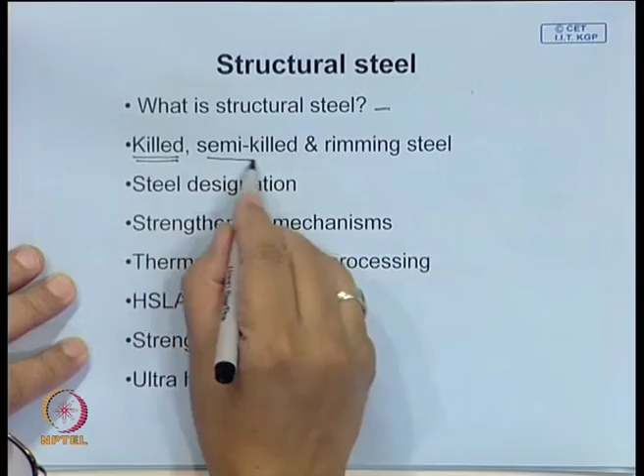We will see how the principle of physical metallurgy has been used in this particular case to improve strength very effectively. Since the 1980s, a very large number of newer grades of structural steels have been used, and these have found application in many other areas as well. Here we will first know what structural steels are, then talk about a few important points. There are steels which we use, put into three categories: killed steel, semi-killed steel and rimming steel, and what they are and how they are produced. We will also know a little bit about steel designations. We will talk about strengthening mechanisms, and find out which of these mechanisms is most applicable to improve the quality of structural steel. We will talk about thermomechanical processing by which this is achieved, and about high strength low alloy steels, also known as microalloyed steel. We will talk about the relationship between strength and toughness, and also know what is meant by ultra high strength steel, how they are produced, and what goes into improving the strength of steel.

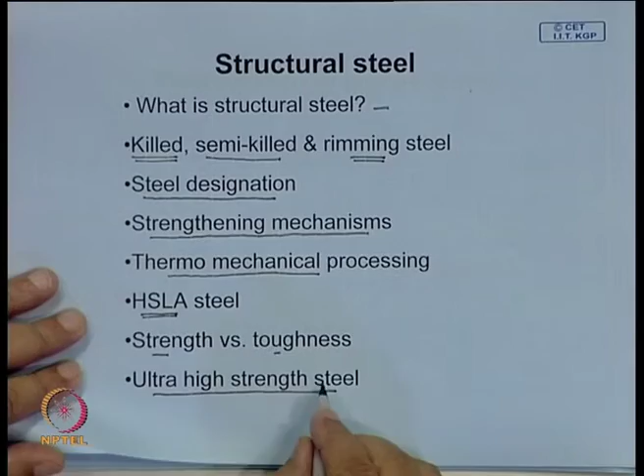We talked about this tetrahedral concept, where properties of materials depend on composition, that is the chemical composition. Similarly, properties also depend on how you process the material. For example, a fine grain structure will have higher strength, so how do you produce fine grain? All these together affect the performance.

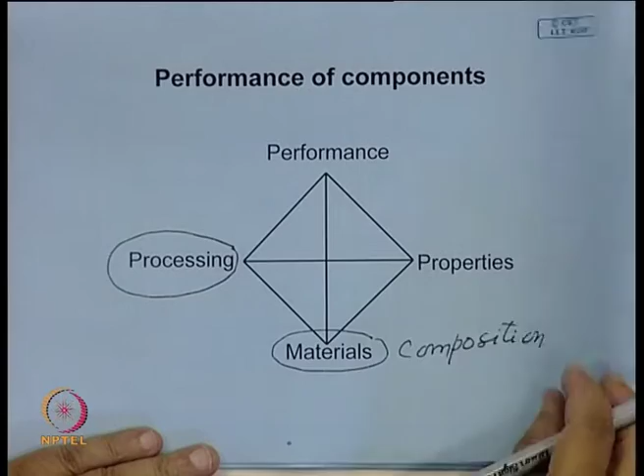Last class we talked about the limitations of hardening a steel, because this is totally dependent on section size. In many cases if the section size is large, it cannot be hardened, because by quenching, the strength of steel can be increased many fold. So this would be the most obvious choice for strengthening, but it cannot be applied because a fully martensitic structure can be attained only over a very limited thickness, depending on the type of steel used. This has been used very effectively to find cases, to utilize this by modifying the composition, and we talked about case hardening. I am projecting this here because I just realized there has been some mistake which I will explain.

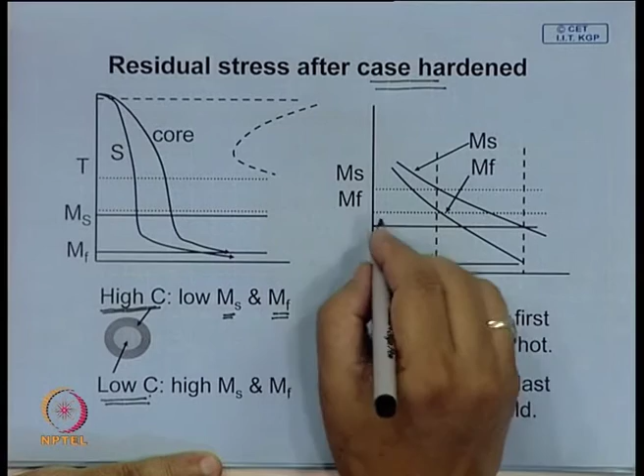When you have a large section, you want the core to be tough, so one would prefer a low carbon steel. Since it cannot be hardened through and through, the attempt is made to enrich the carbon content of the surface by different carburizing processes like pack carburizing or gas carburizing. You increase the carbon content of the case, while the core remains low carbon content. When you make this modification, the MS and MF temperatures decrease. So the case, having high carbon content, will have a lower MS temperature, this is the MS temperature, and this is the MF temperature.

So the case has lower MS and MF temperature than the core. When you quench or cool this job, trying to cool it fast, the core, being the inner portion, always cools slower than the surface. But in spite of this, the core crosses its MS temperature before transformation begins in the case, although the case temperature is lower at any instant. So at any instant, before this starts, it is possible by controlling the cooling rate to allow the transformation to begin first in the core, before it starts in the case. So this line should be, I think, a little to this side.

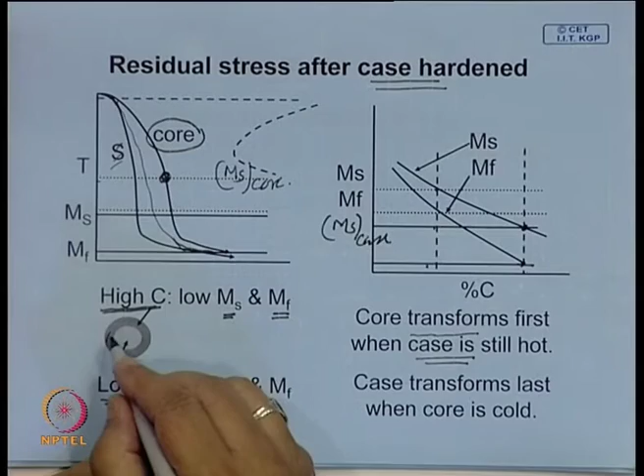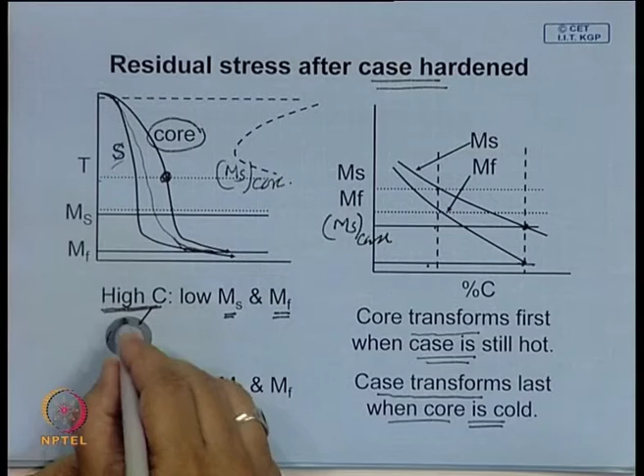So the trick is the core transforms first when the case is still hot. So when the core tries to expand, the case can deform and accommodate the strain. Later, the case transforms last, when the core is cold, so the core will not allow it to expand, and a residual compressive stress develops on the surface.

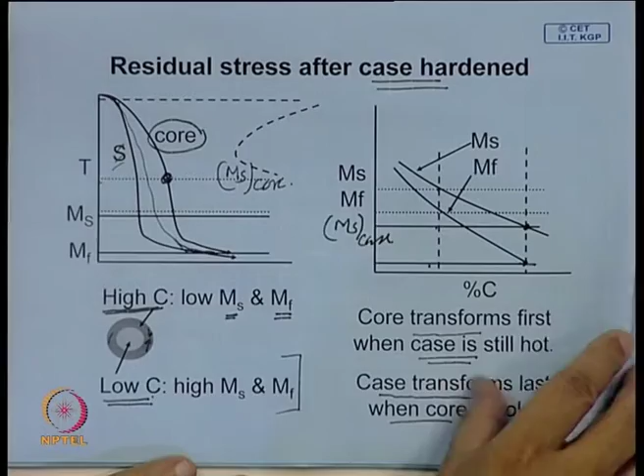This is the reason why, because of this difference in Ms and Mf temperature, by modifying the composition it is possible, through case hardening, to introduce a favorable residual stress - compressive residual stress at the surface - and thereby improve the performance of the component. The same basic principle has been used in structural steel as well, and we will see how this is done.

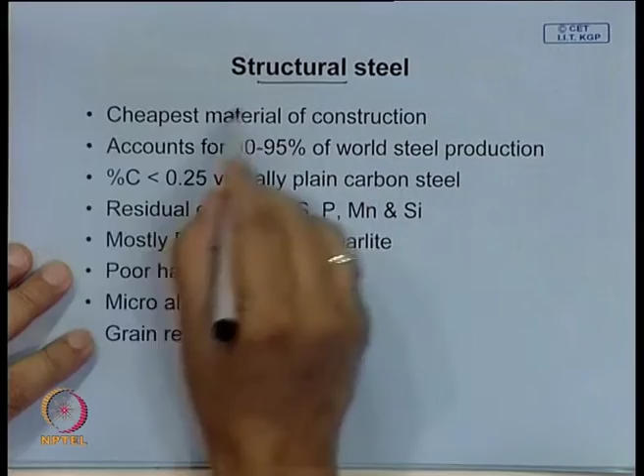Now, what is meant by structural steel? It is the cheapest material of construction. Bulk of construction is made of structural steel, and cost-wise, it is possibly only cement concrete structure that is cheaper; the next cheapest material of construction is structural steel. It accounts for the bulk of world steel production, maybe as much as 95%.

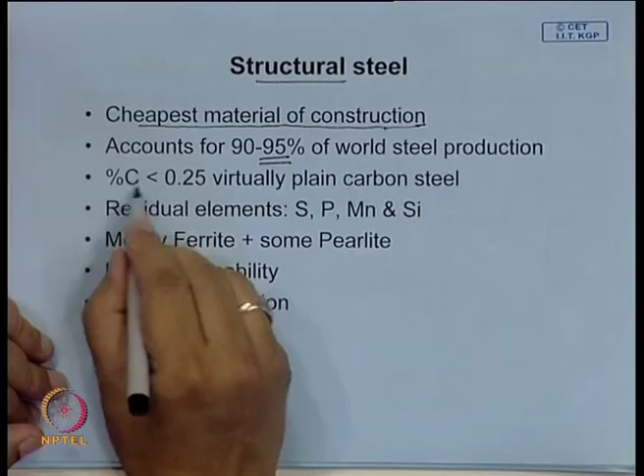We call any carbon steel with less than 0.25% carbon relatively low carbon, and it is virtually plain carbon steel. It has some residual elements which are not intentionally added, which are listed here.

Sulfur is undesirable; it gives hot shortness, makes hot working difficult, and to overcome this, some amount of manganese is added to steel. Phosphorus is also detrimental.

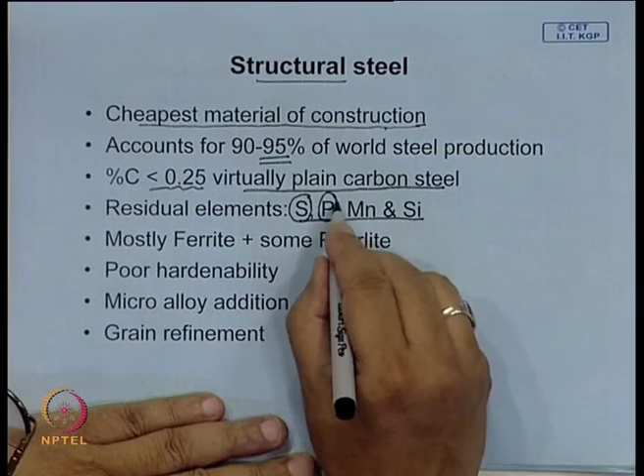Phosphorus has a very high hardening coefficient, it increases the strength of ferrite significantly, it improves solid solution strengthening - it is a very important solid solution strengthener for ferrite - but it segregates to the grain boundary and makes the steel brittle, and it is responsible for cold shortness. It is brittle at low temperature.

Manganese is often used to overcome the bad effect of sulfur. It forms manganese sulphide, which has a high melting point, and therefore it is distributed uniformly in the steel, overcoming the problem associated with hot shortness. Silicon is often used as a deoxidizer, and it also has some beneficial effects as well.

But the amounts in which they are present are very small - like sulfur and phosphorus - you will rarely have more than 0.05% of these, or even better quality steels these days have even less sulfur and phosphorus.

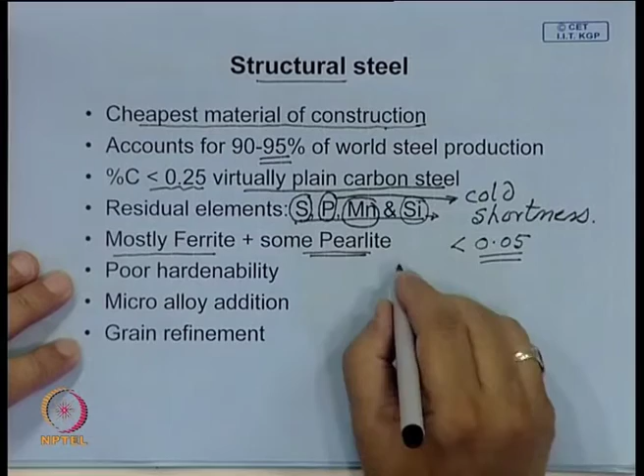This microstructure of structural steel is mostly ferritic. It may have some pearlite depending on the carbon content. Many of these grades have as low a carbon content as 0.07, so virtually it will be made up of mostly a ferritic matrix with a very little amount of pearlite.

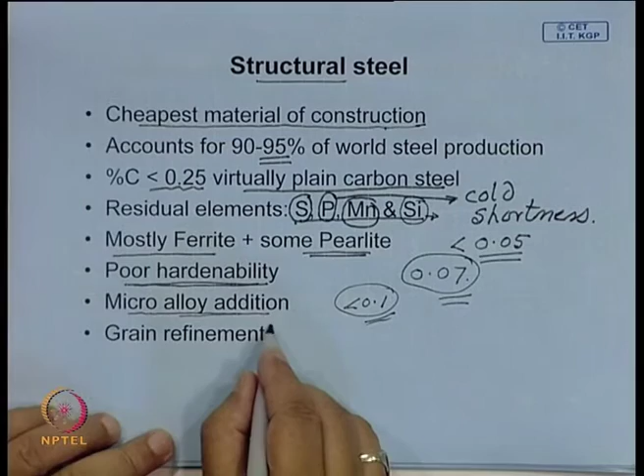Because it has low alloy content, it has poor hardenability, so martensitic strengthening - strengthening by hardening - cannot be done here. Often you may have some micro-alloy additions in very small amounts, even less than say 0.1 or 0.05%. If certain elements are added in such small amounts and combined with thermomechanical processing, it is possible to refine the structure, make the grain size very fine, and thus improve the strength of the steel.

Now let us see what are the factors - I think this was done, but to recapitulate, let us go over a few lines about the three major classifications of steel.

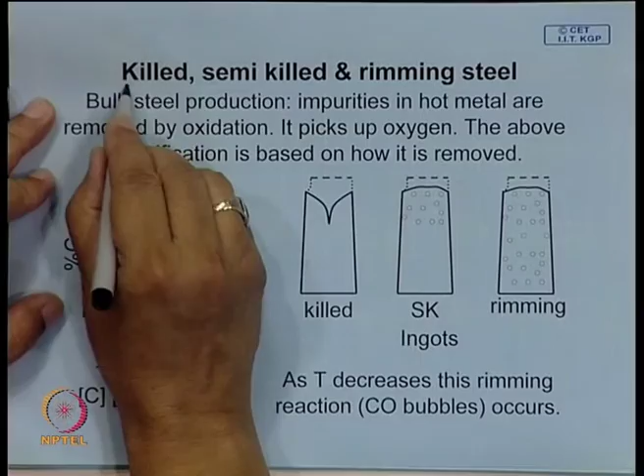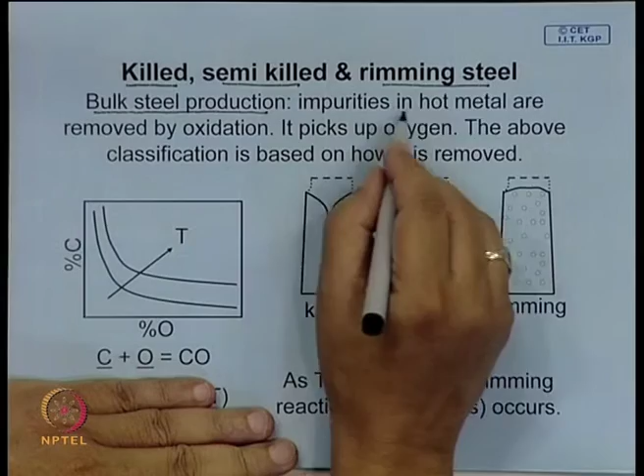It is based on the way the steel is deoxidized. If you look at the bulk steel production technique, it is produced from hot metal, which comes from, let us say, a blast furnace - hot metal which is actually cast iron. It has a very high carbon content, maybe around 4%, it has silicon also, and these impurities also include sulfur and phosphorus, which must be removed to make it steel, because such high carbon material is extremely brittle and cannot be formed.

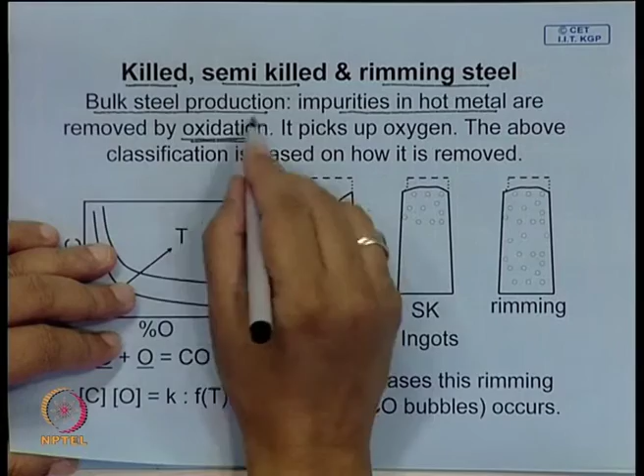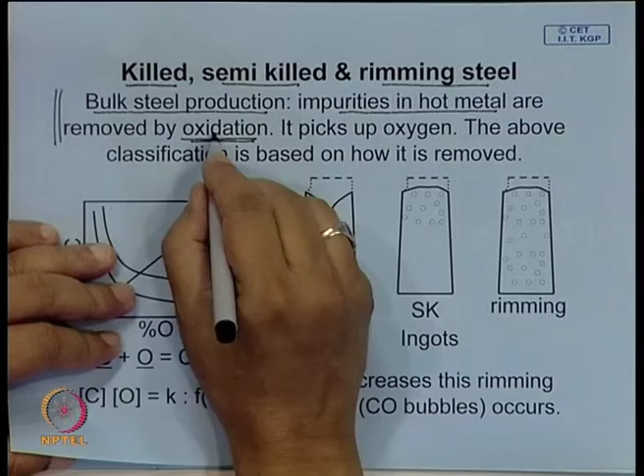So these impurities are to be removed, and this removal is done by an oxidation process. In the Basic Oxygen Furnace (BOF), oxygen is blown from the top, and this oxygen reacts with these impurities, which are absorbed into the slag. In the process, since the atmosphere maintained in the furnace is oxidizing, the steel also picks up oxygen, which is in a dissolved state in the liquid iron.

This dissolved oxygen has to be removed, because as you cool down, unless you do some special treatment to remove it, you often find that when the steel solidifies, there is a vigorous reaction taking place.

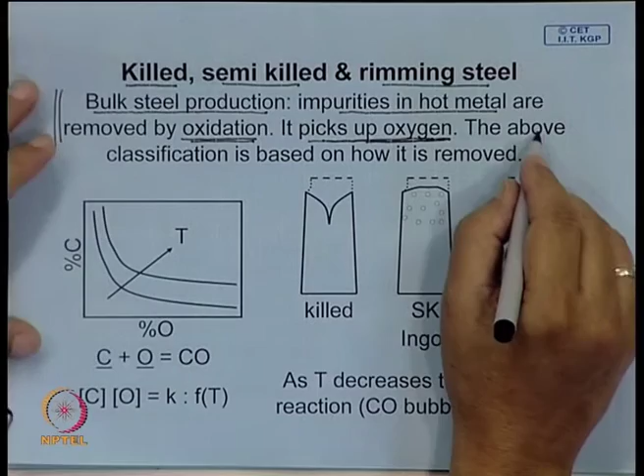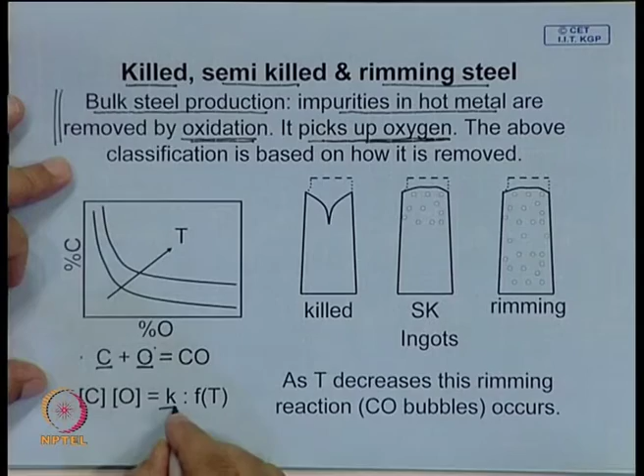This is primarily because in steel, the solubility of oxygen in molten iron depends also on other alloying elements, particularly carbon. You are trying to remove carbon by oxygen, and the soluble amount of carbon and oxygen that can remain in solution in iron is given by this equilibrium reaction. The product of concentration of carbon and oxygen in steel is called the solubility product, and this product is a function of temperature, it is constant.

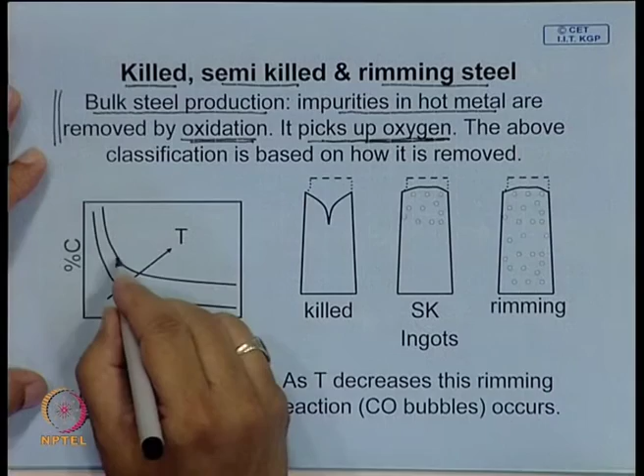If you plot a graph of percentage soluble carbon in iron versus soluble oxygen in iron, you will get this kind of hyperbola, because this equation is that of a hyperbola. Therefore, higher the temperature, higher is the solubility product. So as temperature increases, if it has this much amount of oxygen, it will have this much amount of carbon.

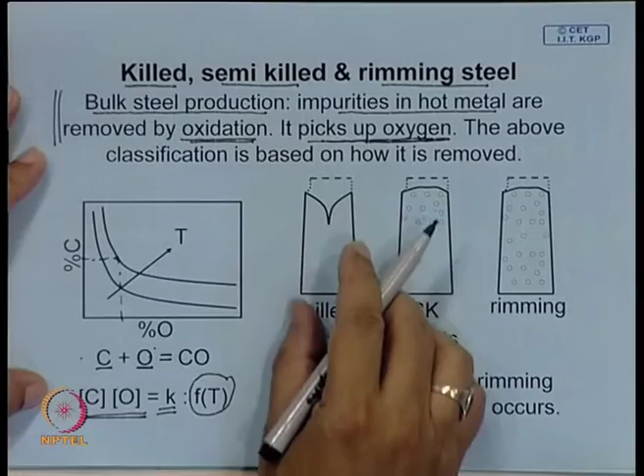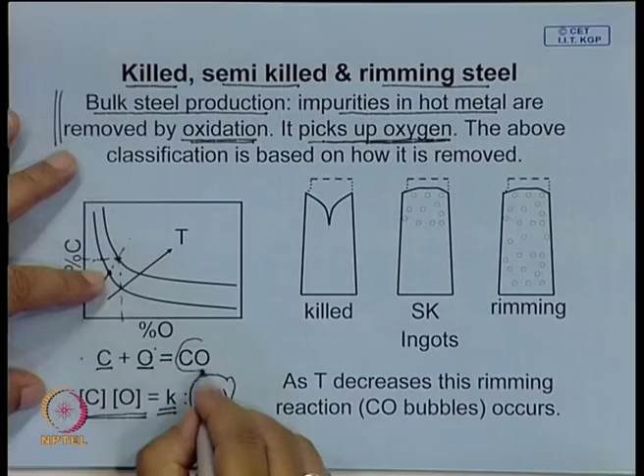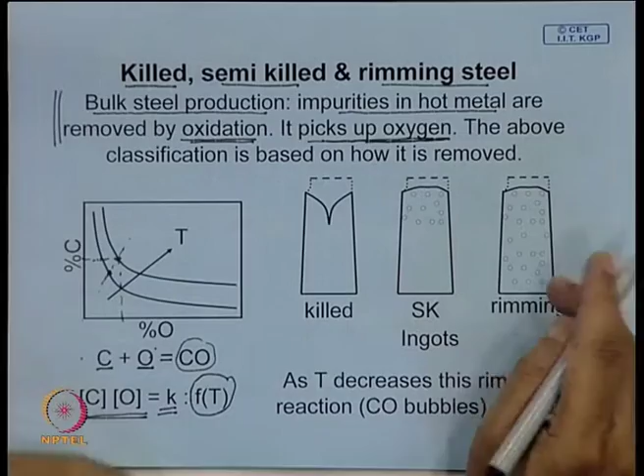But when you cool the steel, when you pour the molten metal into an ingot like this, what happens as the temperature goes down? It has a higher amount of carbon, and that carbon now has to come down. If carbon comes down, oxygen also comes down, since solubility of oxygen also decreases. So what happens to that excess carbon? It reacts and forms CO bubbles, and these bubbles try to form. This is a vigorous reaction, and you have to control it properly.

Often, if molten metal solidifies normally, there should be contraction, and you usually get this kind of shrinkage.

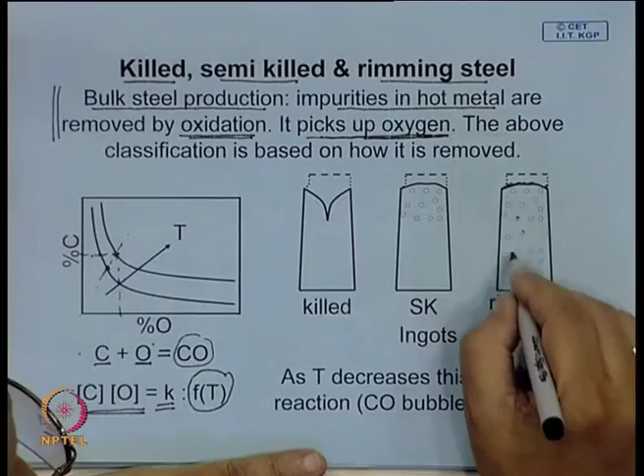Whereas in this particular case, if this vigorous reaction takes place, it is called a rimming reaction, or rimming action. Some of the CO bubbles are not able to escape, because if a crust forms, they won't be able to escape, and you get a steel which is full of CO bubbles, and it compensates for the shrinkage cavity. This has one advantage, you get higher yield, but it has a problem: you have some amount of dissolved oxygen in the steel, and oxygen makes the steel brittle.

So rimming steel, although during subsequent rolling these pores seal up and all that, because of some amount of soluble oxygen in the steel, it has relatively poor ductility and a higher transition temperature.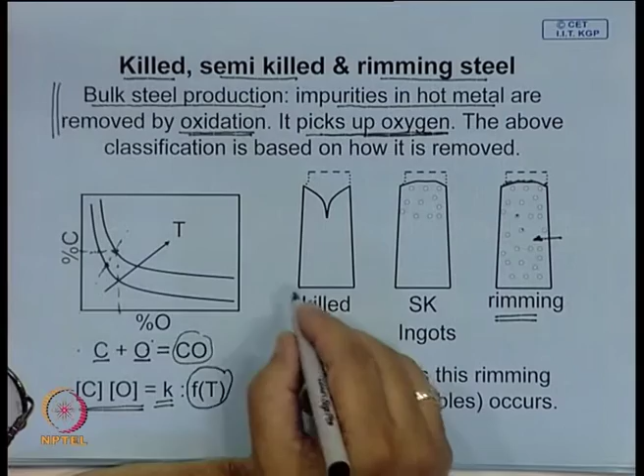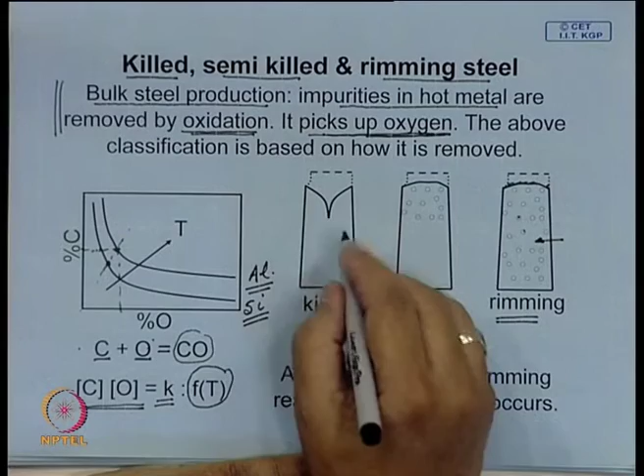At the other extreme, if you add a deoxidizer, and one of the preferred deoxidizers is aluminum, which has a very strong affinity for oxygen, this oxygen will be used up by aluminum or silicon. Depending on what you are adding to the steel, you can stop this rimming reaction completely, and in that case you kill this particular reaction. That means you kill the steel which is very reactive.

Therefore, you get a large shrinkage cavity, and when you roll here, of course, the yield is low, because later on you have to crop a certain part of it which cannot be shaped into, say, flat products or sections.

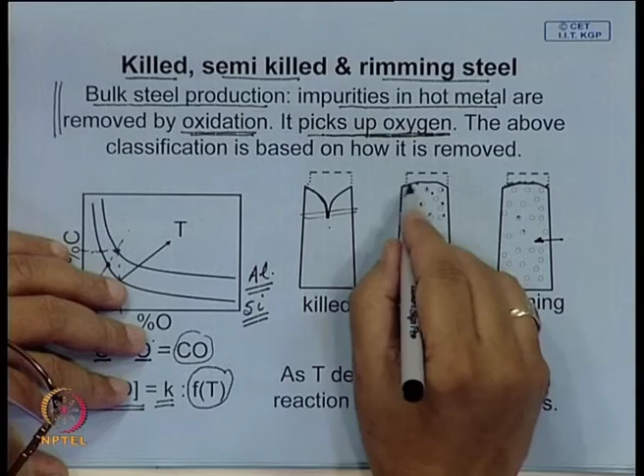In between, it is also possible to have a controlled amount of this deoxidizer, so that you can control this rimming action and not allow this shrinkage to take place. So some amount of CO bubble is allowed to form, and by this the yield can be increased.

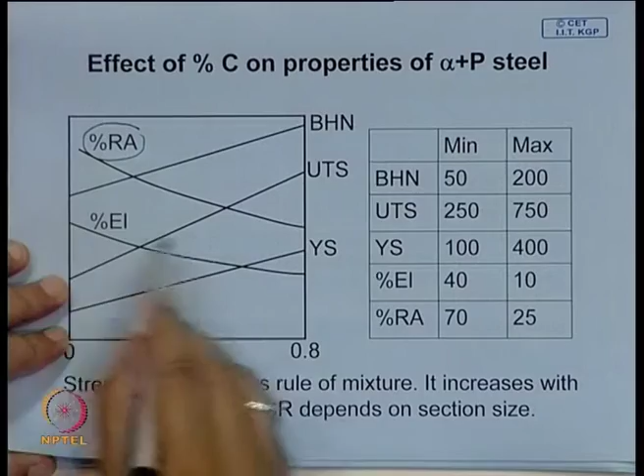Now, a quick look at the effect of carbon content on the properties of steel. I think this was mentioned earlier, that with carbon content, yield strength, UTS, and hardness all increase, but the ductility, represented by reduction in area, decreases with increasing strength or increasing carbon content. Ductility, if expressed in terms of percentage elongation, also decreases, and these are the values of that range of properties, which are listed here.

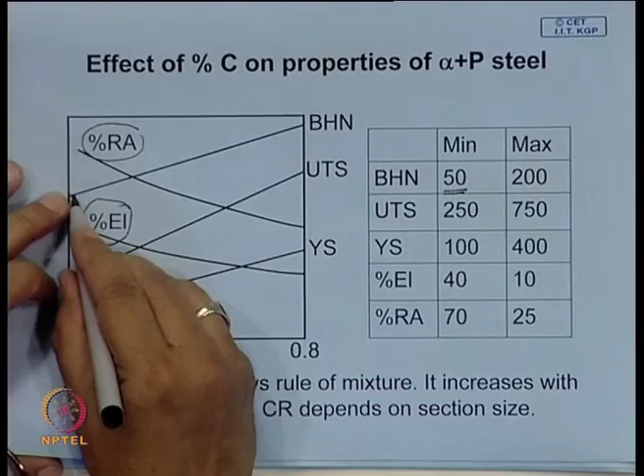The Brinell hardness number is minimum particularly when you have virtually no carbon, and if you have 0.8 carbon, you get something like this. UTS, ultimate tensile strength, is of this order in MPa, megapascals, and similarly some values are listed for ductility as well.

So strengthening in these types of grades follows the rule of mixtures. If you increase the amount of pearlite, its strength will increase, and by cooling rate it is also possible to control the fineness of pearlite. If you increase the cooling rate, and the pearlite becomes finer, then also the strength will increase.

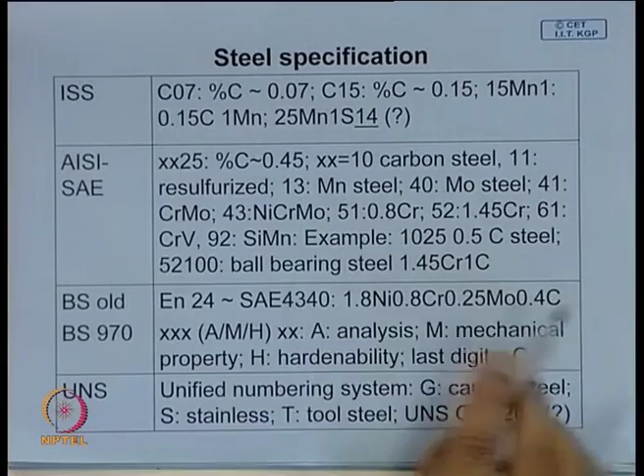Now, a few points about steel specifications. Obviously, most of the specifications are based on composition. Different countries follow different standard specifications, which are listed here.

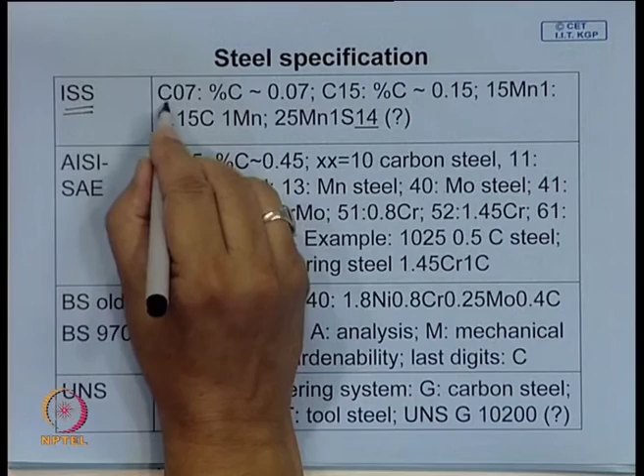Say suppose carbon steel, if it is a plain carbon steel, one way of representing it is C07. Here this number represents percentage carbon, and for percentage carbon you divide by 100. So 0.07% carbon, this steel C07 represents that. C15 means carbon content is 0.15.

Sometimes you have certain other alloy elements, and there you do not write C, you write the main alloying element which is present. So you say 15Mn1, where the first two numbers represent carbon content, that is 0.15, and the second number gives the manganese content, 1% manganese.

Sometimes these grades have more elements. We mentioned that normally sulfur is undesirable, but there are certain grades where you add sulfur, particularly where you need very good machinability. There you need a little bit of inclusions made of manganese sulphide, which improves the machinability of steel. So this is one such steel: 0.25 is the carbon content, manganese is 1, and sulphur is 0.14.

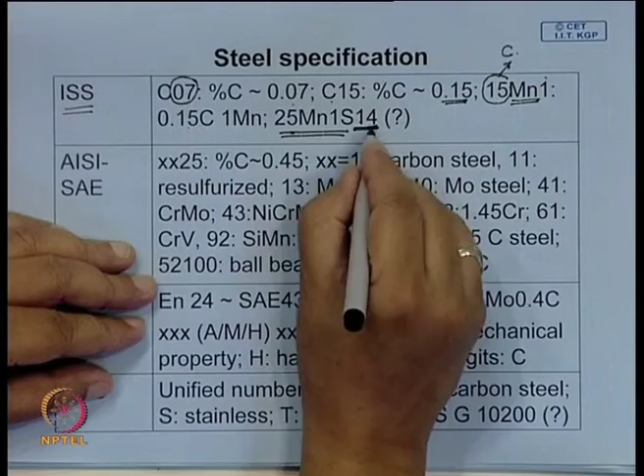Sometimes you use an underline to show that this is 0.14, not 1.4 or 14, which would be unexpected, unheard of. So if any number is underlined, say 5 underline, that means 0.05, or 15 underline means 0.15.

Now, many of these have been derived from systems followed by the American Iron and Steel Institute, or the Society of Automotive Engineers. So this AISI specification is written like this.

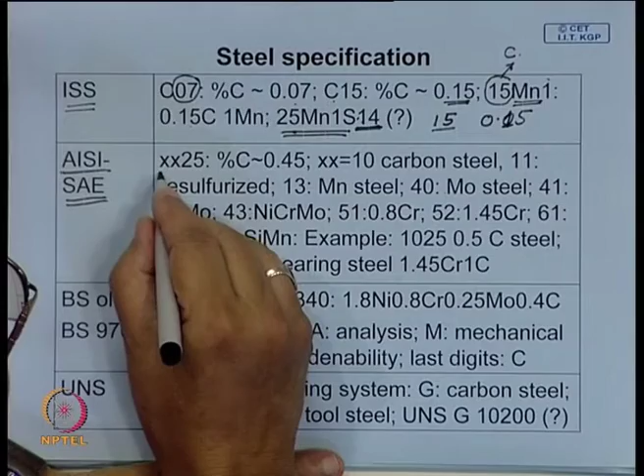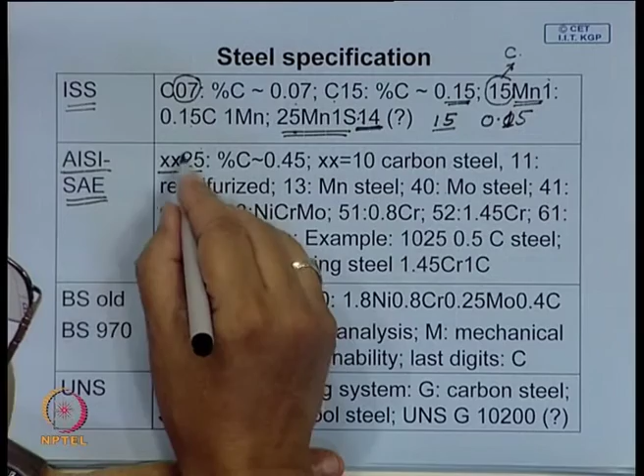You use 4 digits: the first 2 digits represent the type of steel, and the last 2 digits represent carbon content, like XX25. This 25 means the carbon content is 0.25. There is a mistake here, it should be 0.25 carbon content. And this XX, if it is 10, means it is plain carbon steel. First 2 digits, if 10, means plain carbon steel.

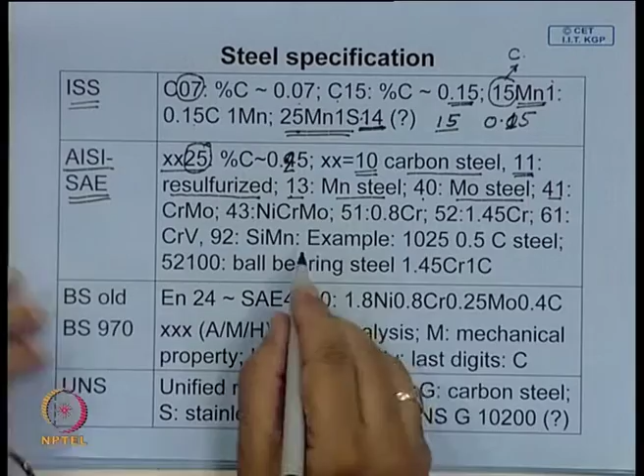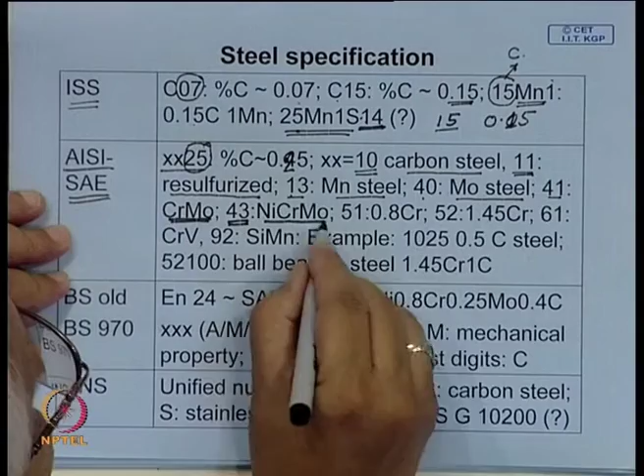First 2 digits, if 11, this is resulfurized steel. 13 means manganese steel, 40 means moly steel. 41, by convention (there is no real basis, but following this convention it's possible to guess the composition and major alloying elements), 41 means chromium molybdenum. These alloy contents may not be much larger, maybe 1% or 2%. 43 means nickel-chrome-moly.

First 2 digits 51 means 0.8 chromium steel. 52 is also a chromium steel, this is a bearing steel, with 1.45 chromium. 61 means chrome vanadium steel, 92 means silicon manganese steel.

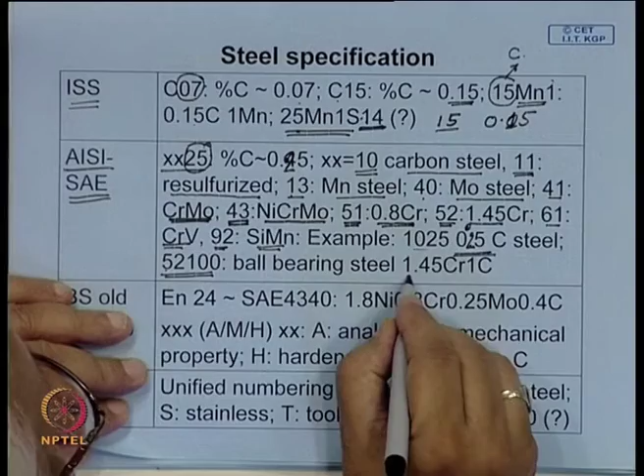So one example given here: 1025, this is actually a 0.25 carbon steel, there's a mistake here. This is a ball bearing steel, 52100, which has 1.45 chromium, and the last 3 digits represent carbon content, with carbon being 1%.

Now, British specifications - the old specification has no real basis as such, like these are certain numbered engineering steels, EN24, which is equivalent to SAE 4340, and this is the composition of that steel.

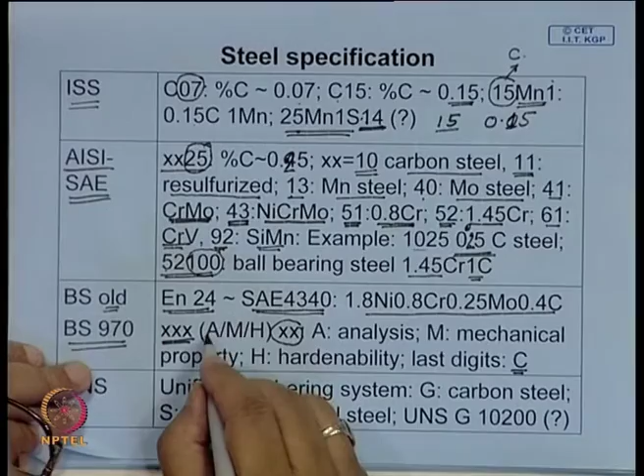And the new BS spec uses digits like this: the first 3 digits signify the composition alloy element, and the last 2 digits give the carbon content. It also uses certain letters A, M, H, which indicate whether the specification is by analysis, by mechanical property, or whether it is a hardenable grade.

This specification varies from country to country, and attempts have been made to use a unified numbering system, the UNS system. Here they use a letter grade to represent the type: G for carbon steel, S for stainless steel, T for tool steel. And you can see this is simply a plain carbon steel, and you'll find this will be a 0.2% carbon steel.

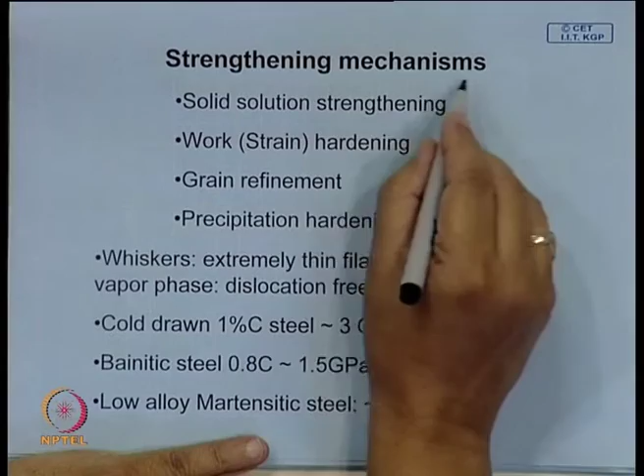Now let us see, we have talked about some steel specifications. We also learned that structural steels are basically plain carbon steel. Now let us see what type of strengthening mechanism will be applicable here, because since the section size can sometimes be very large, and since it has low carbon content and low alloy element, it has little hardenability. So the strengthening mechanisms which are normally applicable in steel may not all be applicable. We will see which will be most preferable.

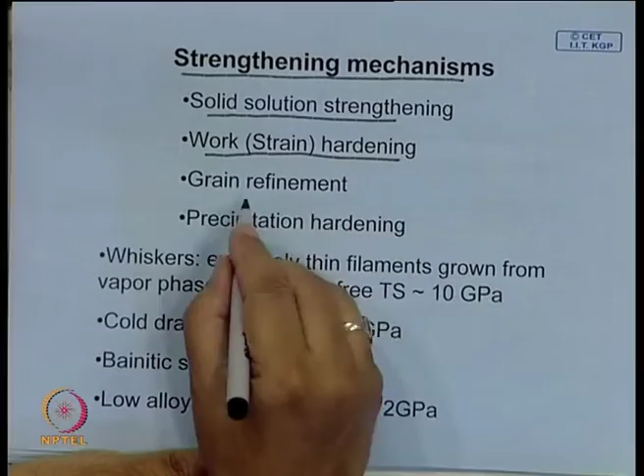One is solid solution strengthening, which we learned about earlier, then strain hardening or work hardening, grain refinement, and precipitation hardening. These are the common strengthening mechanisms used to improve the strength of steel, and for any metal or alloy, these are the basic strengthening mechanisms.

Just to give an idea, what is the strength of steel? Iron can be made in the form of whiskers, very fine filaments grown from the vapor phase. These are so fine that normally we see dislocations have a stress field, and two dislocations cannot stay very close by. So if it is possible to make a material where it is impossible to accommodate a dislocation, if the dimension is very small, it is quite likely that this material will be defect free. These whiskers are very thin filamentary crystals, virtually dislocation free, and their tensile strength is of the order of 10 GPa.

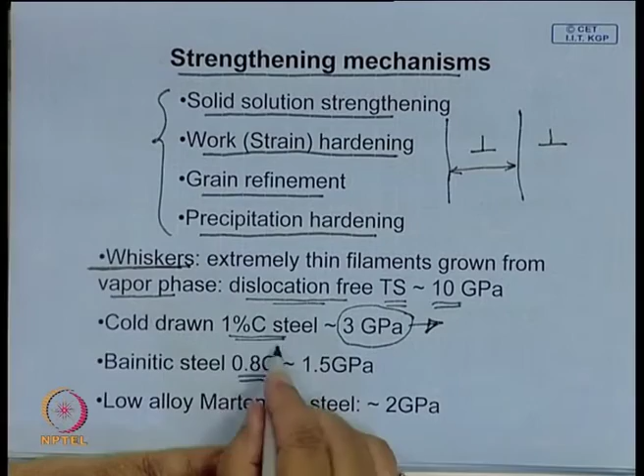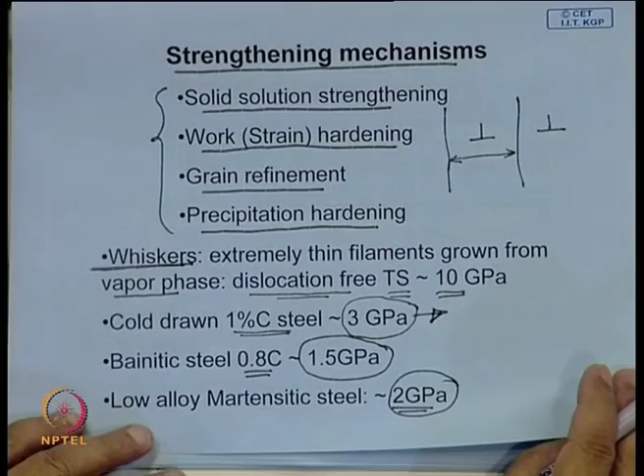By cold drawing 1% carbon steel, it undergoes a very special deformation process by which you can achieve this in actual practice. For bainitic steel, the strength will obviously depend on the amount of carbon present. If it is 0.8%, you can get a strength level of about 1.5 gigapascal, whereas for low alloy martensitic steel you can get strength of a different order. But very often the structural steel that we use is not martensitic, so let us see how we can strengthen them.

Now in structural steels there is a limitation in strengthening mechanisms. What are they? There are common forms of structural steel, such as I beams, L sections, plates, strips, cold rolled sheets, pipes, tubes, bars, wire rods, wires, and wire ropes. When these structural steels are made, they are often required to have not only strength and toughness but certain other additional properties, depending on the downstream application.

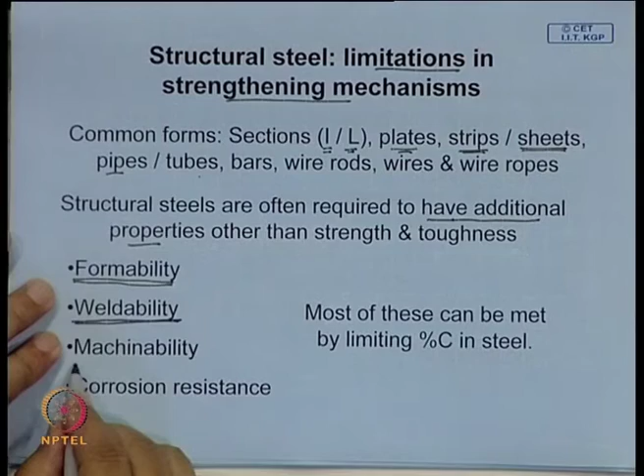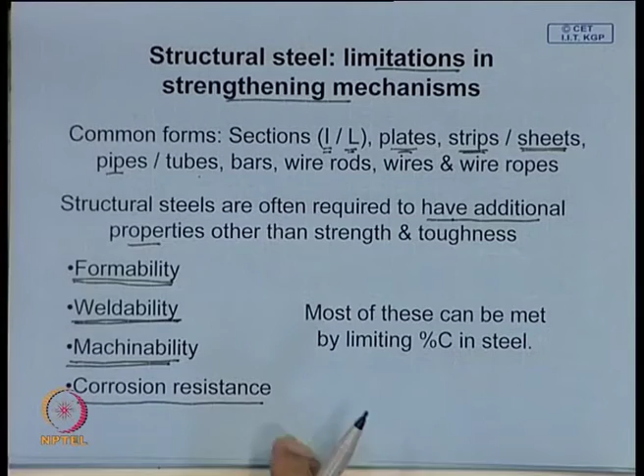Suppose you want to form an automotive body made up of thin steel sheet. In that case, the property we look for is formability, and often just formability is not enough. Sometimes you have to join or give a proper shape, so it should be amenable to certain fabrication processes, like welding. You have to look at the weldability. Sometimes machinability is important for certain applications, and for many applications you also look for corrosion resistance.

Many of these properties can be met by limiting the percentage of carbon in steel. But the problem is, if you decrease the percentage of carbon in steel, its strength will go down. How do we make it up? Let us see how this is possible.

Now a quick look at solid solution strengthening. If you add a solute atom, it will have a different dimension, so there will be some elastic distortion, creating a stress field. We know deformation takes place through movement of dislocations. Suppose this dislocation is moving in this direction through a stress field, so it is not free to move. The dislocation's movement is hindered by the stress field of these solute atoms.

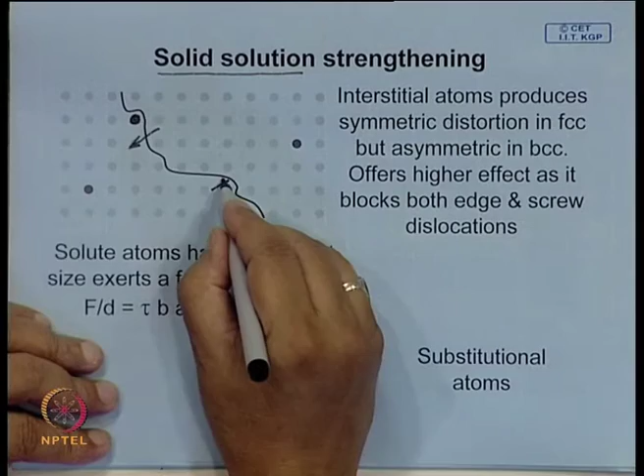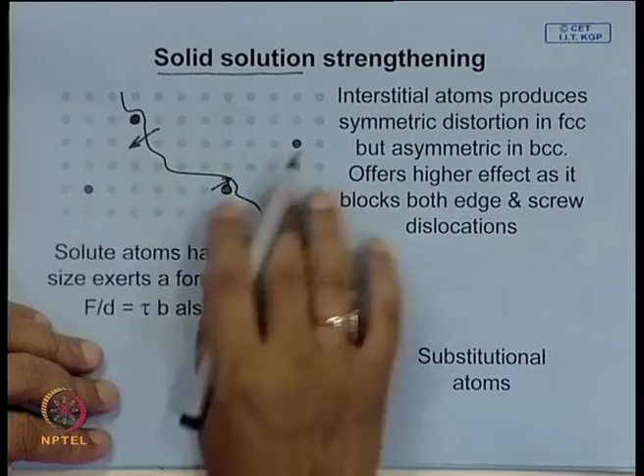The overall effect will depend on how closely the solute atoms are spaced. So the more atoms there are, the more the strengthening will be. It has been possible to work this out, and we will see it quickly here.

Now it is possible to find out how much force is exerted by the solute atom on the dislocation, and this force will depend on the number of atoms. What is more important is the force per unit length of the dislocation exerted by the solute atom. If d is the spacing between two solute atoms, then this gives the force per unit length. To move the dislocation you apply a shear stress tau, so the force on the dislocation will be tau times b, and the two must be equated.

If you equate the both, it is possible to find out a relationship between that, and also if you know the atom fraction of solute present, it is possible to show that the distance between two atoms will be roughly equal to 1 over root of atom fraction of that solute element. If you substitute this, you will find that increment in tau, the shear strength, will be proportional to square root of the solute content. This is the case where solute atom is a substitutional solute atom, and the same can be extended to cases of interstitial atoms also.

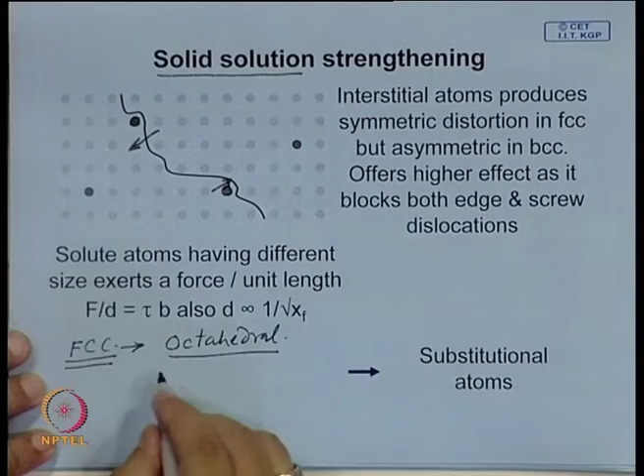But for interstitial atoms, in face centered cubic, in FCC, that is austenite, carbon occupies, let us say, octahedral sites, and these sites are symmetrical. So in FCC, whenever you have a carbon atom, the distortion it produces is uniform in all directions. Whereas in BCC lattice, even if the carbon atom occupies tetrahedral or octahedral sites, more likely, people have seen by experiments that carbon prefers octahedral sites, and these octahedral sites in BCC are not symmetric. In one direction it is large and in another direction it is short, the interstitial gap is shorter.

So when a carbon atom goes into the interstices, it produces expansion in one axis, the C axis, and this introduces a tetragonal distortion in the lattice. This distortion is quite large, and it is a more important factor for strengthening. As I summarized, there is symmetric distortion in FCC but asymmetric distortion in BCC, and asymmetric distortions are more effective in blocking dislocation movement, because uniform stress can block only edge dislocation movement, whereas asymmetric distortion has shear stress and can block screw dislocation motion as well. So they are much more effective barriers to dislocation motion and produce a high amount of strengthening, and this is also proportional to the number of atoms present.

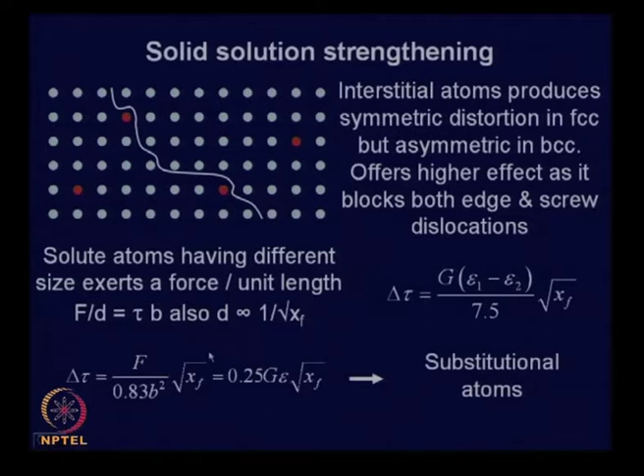It is also proportional to square root of atom fraction. So this relationship is applicable for interstitial atoms, and this is the relationship for substitutional atoms.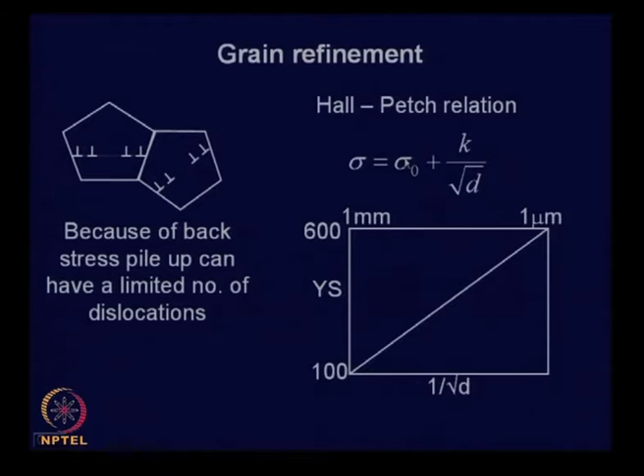This is a diagrammatic representation. If you plot yield strength against 1 over root D, you get a linear line, and from this you can find out sigma 0 and k.

We also talked about precipitation strengthening at length, and there are two mechanisms which are important: one is particle looping, another is particle cutting. This limiting strength, the critical resolved shear stress of the material, is the looping stress, directly determined by the particle distance, and for a given volume fraction of precipitate it can be related to the particle size also.

This has this kind of relationship. Initially you do not have any precipitate. As the precipitate grows, the volume fraction of precipitate increases, and the precipitate also grows in size, R also increases. The stress required to cut a fine precipitate is given by the volume fraction of precipitate raised to the power half and the radius of the precipitate raised to the power half.

So this plot looks like this, and this is the optimum strength that you expect. After that, if the precipitate coarsens, then the strength drops.

So to get ideal strength, maximum strength, what you need is a high degree of supersaturation. So you need a supersaturated solid solution, and then when you age, the precipitate that forms must be coherent, and the coherent precipitate is always associated with some lattice strain.

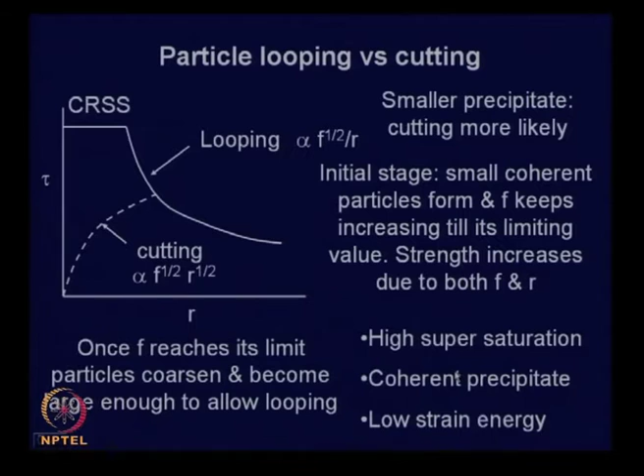We talked about this lattice strain. If there is too much lattice strain as the precipitate is trying to form, this will oppose the driving force, so too much lattice strain is also harmful. So you may have some amount of coherency strain it can accommodate - some low strain energy, not too much - along with a coherent precipitate and high supersaturation. By controlling this, you can control the extent of precipitation strengthening.

Now, by most of these strengthening mechanisms, if you try to increase the strength of a crystal, what effect does it have on the ductility? Recollecting our initial stress-strain plots, normally brittle materials are those which break even before plastic deformation occurs - a brittle material's stress-strain plot will be virtually linear, and then it breaks.

In fact, martensite - if you have a fully hardened steel wire hardened to martensite - if you find its stress-strain diagram, you will find it breaks before it deforms. But the same steel wire, if you anneal it to make it ductile, will exhibit a different stress-strain behavior: before it fails, it passes through a necking region, with very large percentage elongation and reduction in area. It has been seen that if you try to improve the strength of the material, whether by cold working...

If you take a wire and try to bend it repeatedly, each time you bend it you are causing some deformation in the material, and its strength increases. In the process it reaches its limiting strength, and later on you find it breaks when you try to deform it further. So that means if you increase the hardness, yield strength, or tensile strength of the material, its elongation and ductility decrease.

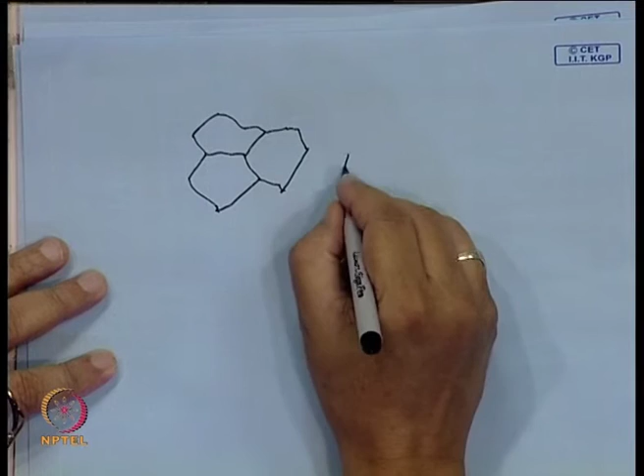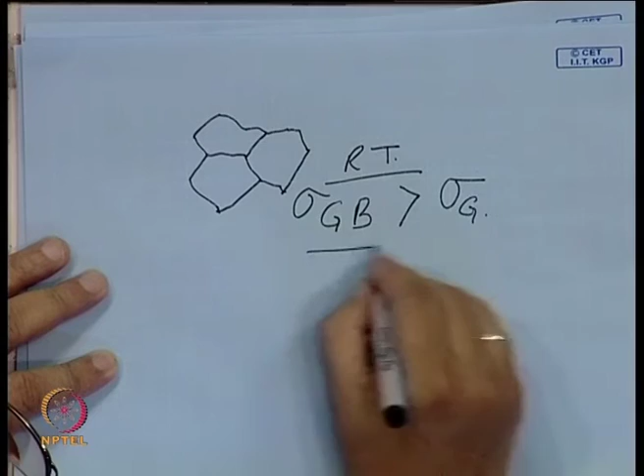When fracture takes place, there are certain crack paths which are favorable. Usually at room temperature, grain boundaries are stronger, meaning the strength of the grain boundary is greater than the strength of the grain. So if a fracture takes place at room temperature, it is more likely that the fracture takes place through the grain.

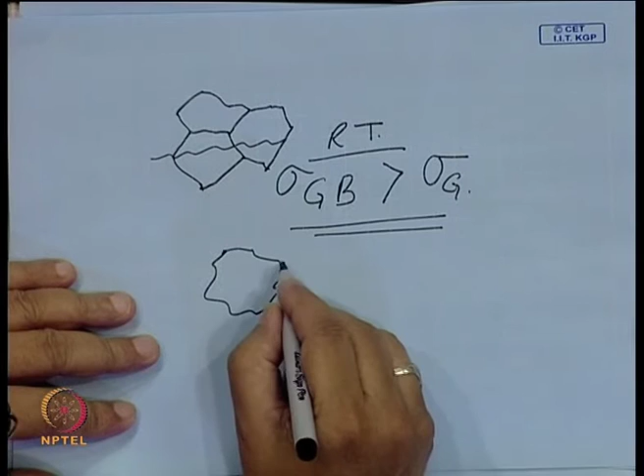In certain cases, some solute elements segregate to the grain boundary, and that makes the grain boundary brittle. Because of this segregation, the grain boundaries become cold short.

One example of this segregation is a thin network of brittle cementite, or a monolayer kind of precipitate, say phosphorus segregating at the grain boundary. This makes the steel brittle because it provides an easy fracture path, so the crack can propagate along the boundary, causing intergranular fracture, and the material becomes brittle.

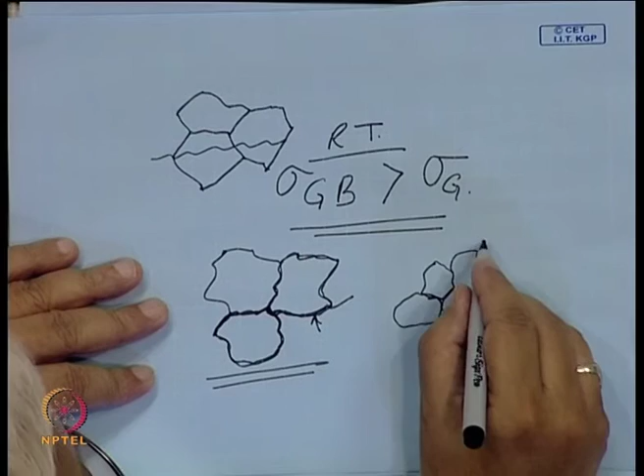Now, if you make the grain boundaries finer, you reduce the chance of this segregation because you have more total grain boundary area, so the chance of a brittle network forming is reduced. This is one reason fine grain steel is more resistant to crack growth, making grain refinement a mechanism that improves strength without sacrificing ductility or toughness.

Now a quick look at how you control grain size in steel. One method is by cold working and annealing. Through this process, as discussed earlier, it is possible to get both very coarse grain structure and very fine grain structure.

How do you do this? This is a typical annealing curve. When you anneal a cold worked material, it has very high hardness. Consider a low carbon steel, mostly ferritic. During the recovery stage, there may be a little increase in hardness due to strain aging, where solute atoms, particularly interstitial carbon and nitrogen, can precipitate and block the dislocations. This can increase strength slightly, but it helps remove residual stresses and micro stresses through rearrangement of dislocations. After a certain temperature, there is a rapid drop in strength.

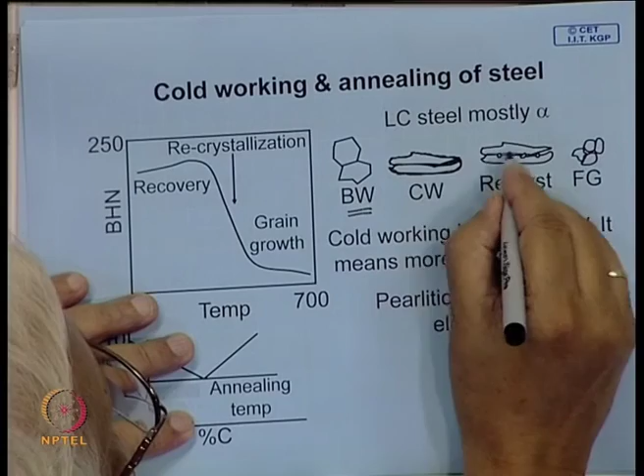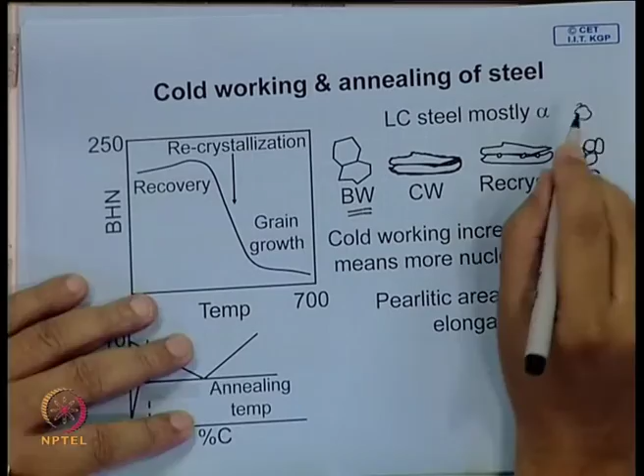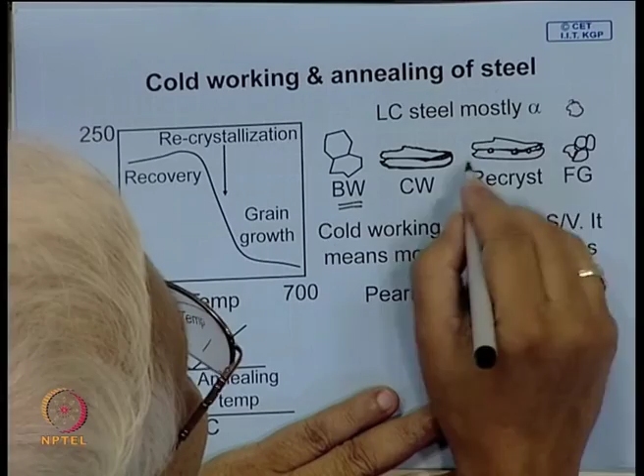So there is a driving force existing, but fresh grain cannot nucleate because to nucleate a new grain, new area has to be created. One has to overcome this surface energy barrier, and grain boundaries provide heterogeneous locations where it can easily be overcome. These are the nucleation sites, and when these grains grow, finally all of the original structure is replaced by these fine grains.

Now cold working, in fact, increases the surface area to volume ratio, so it provides more sites for nucleation of strain free grains.

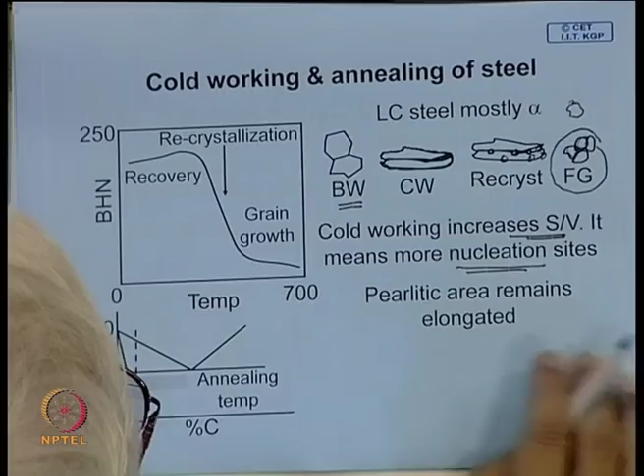So, it means there are more nucleation sites, and the higher the cold work, the finer the grain. By controlling the amount of cold work, it is possible to control the grain size. Usually the annealing temperature for cold working of low carbon steel is in this regime; you do not go to the austenitic region.

So definitely, if the pearlite area gets deformed, it will remain like this—they do not undergo any recrystallization, but the ferritic region will undergo recrystallization. Recall that the grain size is determined by the critical nucleus size, which is inversely proportional to the cold work. So higher the cold work, finer the grain, and also the lower the activation hill to overcome, so the nucleation rate will be faster. Faster nucleation rate means finer grain.

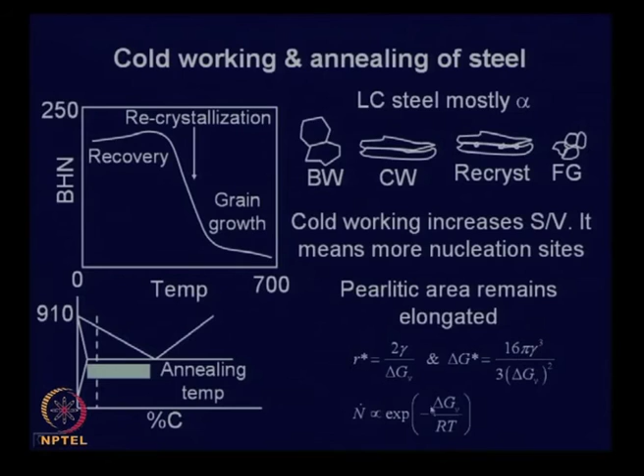Now, hot working is a process where recrystallization and plastic deformation virtually take place simultaneously. It is possible to calculate the time it takes for recrystallization, because the process is determined by the movement of iron atoms within the lattice—self diffusion of iron. We know the self diffusion coefficient is given by the exponential minus Q by RT, where Q is the activation energy. So if you know the activation energy for self diffusion, it is possible to calculate the time for recovery and recrystallization.

Often, say at 800 degrees centigrade, you will find the time may be of the order of a few seconds. That means by the time the job cools, if you are working at this temperature, the time it takes for the job to cool to room temperature is enough for recrystallization to take place. So when the job cools, you will find it is soft.

So hot working actually shows instant recrystallization on plastic deformation, which is pictorially shown here. These are the initial coarse grain structures, and during rolling these grains get elongated, and these are the nucleation sites. Since the temperature is high, fresh grains are forming. To get a fine grain, you have to decrease the diffusivity.

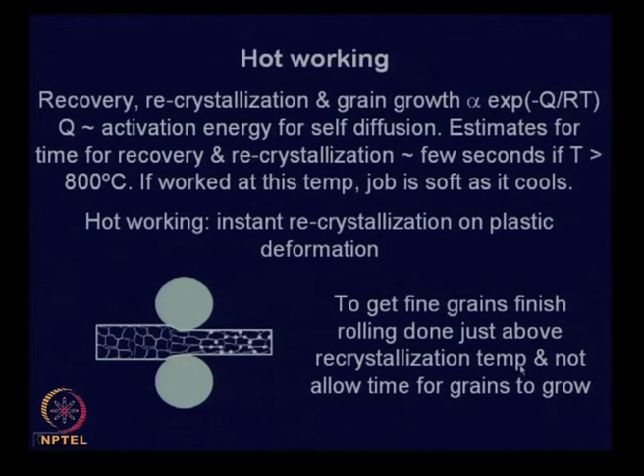So as it comes out of the rolling mill, it does not get enough time for the recrystallized grains to grow. Also, the austenite grain size determines the final fine structure. If initial grain size is coarse and you deform it, the final structure is likely to be coarse. If initial austenite grain size is finer and you deform it further, you make it more fine, and the chance of getting a fine grain is higher.

We also know that austenite grain size affects the CCT diagram, as pictorially shown here. If the grain size is fine, transformation starts at a higher temperature. If the grain size is coarse, transformation takes place at a slightly lower temperature. So by playing with this, it is possible to control the final structure of steel.

To sum up what we covered today: we talked about structural steel, steel specification, where we again emphasized the effect of carbon content on strength and ductility. We talked about strengthening mechanisms that have been or can be applied, the relationship between strength and toughness, and how controlling grain size can increase both strength and toughness. We also discussed how to control grain size by controlling the degree of working and the recrystallization temperature.

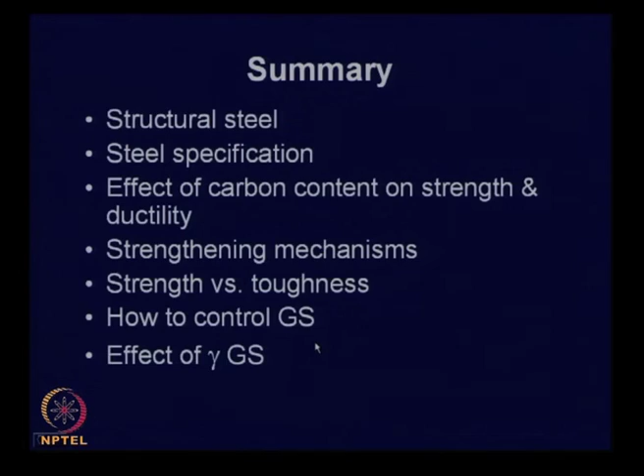We will see a little more about it in the next class. Thank you very much.